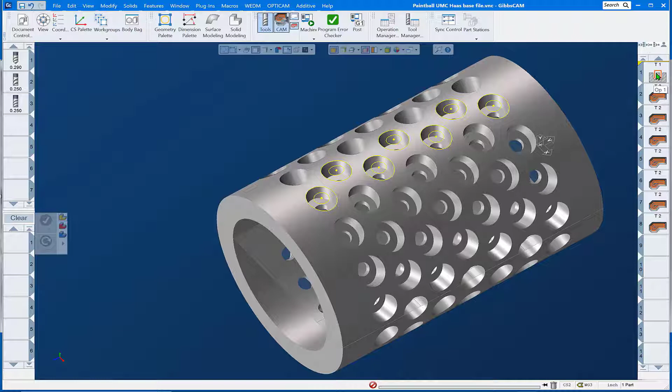Hello and welcome to this GibbsCAM Tech Tip on Transforming Toolpath. We're looking at a rotary encapsulated die here that we need to do some repetitive toolpath on, and then rotate it around this part to complete the operations we need to perform.

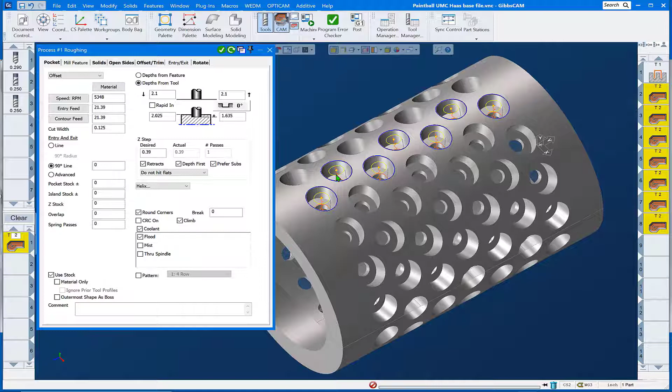So looking at this, we have a simple drill routine running down this row of 4 and back up this row of 3. And we also have a roughing pocketing routine that's doing the same thing. Down the row of 4 and back up this row of 3. And there's actually 13 instances around the part.

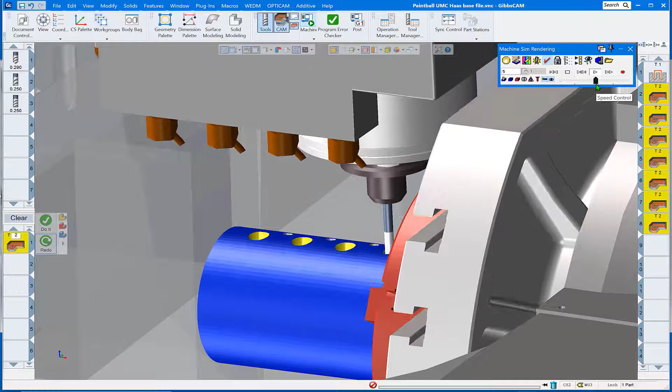So let's take a look and see what this looks like in cut part rendering. We got our Haas UMC 750 set up here. And we'll go ahead and do a render start. And we can see that it drills the 7 holes right in the manner we want. And now we're pocketing down a row, back a row, just what we need. Okay, well, let's get this populated around the whole part then.

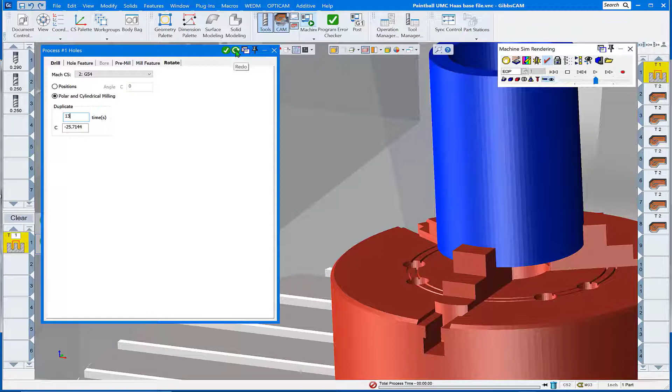First off, we'll do the drill routine. We're just going to come in here under the rotate tab, tell it we want 13 instances of that at this angular displacement, and give it the redo button. And it updates that process and operation over there on the right. And we'll do the same thing for the pocketing routine at 13 more instances at the same angular displacement. Say redo it. And the rendering updates.

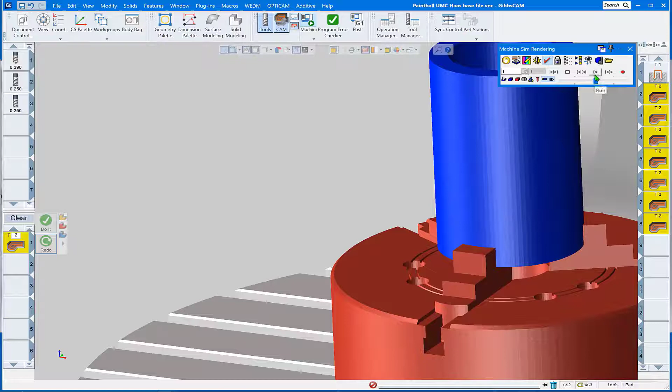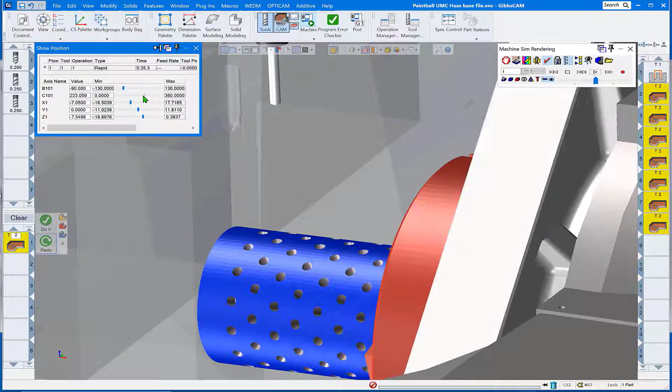And let's rerun the rendering. The play button here. And bada bang, it knocked out all the drill routines. Let's take a quick look at what we got here. We open show position, we can move the Z-axis head up out of the way and rotate the C-axis around to see what we have. And yes, we covered all the start holes we were supposed to on the die.

Let's go ahead now and run the pocket routine. Well, that is not quite what we were hoping for. What it's done is taken the operations over on the right hand side and done exactly what we asked it to and repeated it 13 times at that angular displacement around the part. That's not quite the toolpath we were hoping for. So let's undo that. Let's set this back to 0 and do a redo of that.

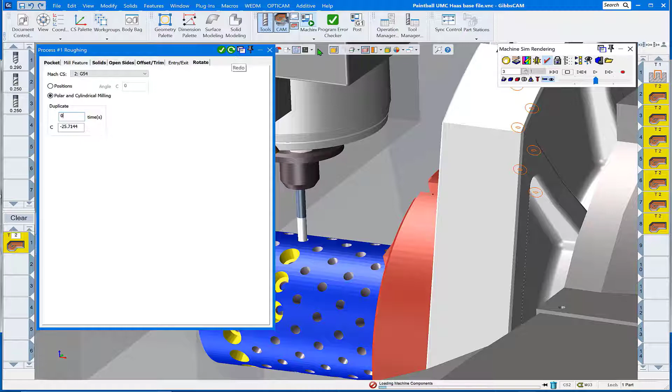It updated the rendering, and before we start the rendering, what we want to do is transform the toolpath. Tip of the day. We have these operations all highlighted, and we're going to go into Plugins, Toolpath, Transform Toolpath. The transform ops dialog comes up. We have the ability to translate either in HVD or in a rotary fashion, which we're going to do today, around an HV center at our angular displacement we wanted.

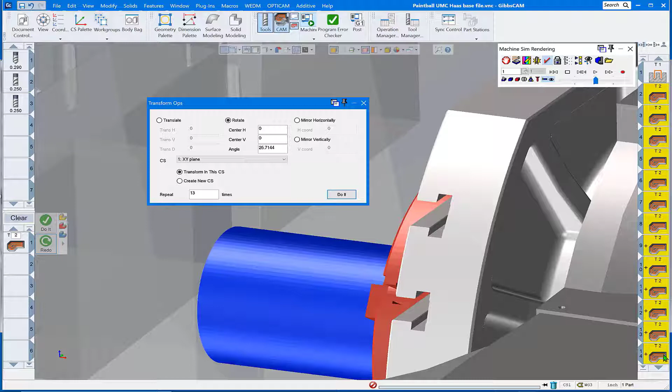From the XY plane, we're going to transform in this CS 13 times. We'll do the do it button. And sure enough, we have our additional transformed operations over here on the right. And let's run a render and see what we have. Here we go with our pocketing, and there we go. Down the row of 4, back the row of 3, second instance down the row of 4, back the row of 3.

So there you have it, Transform Toolpath, one of those easy, quick tools in GibbsCAM.